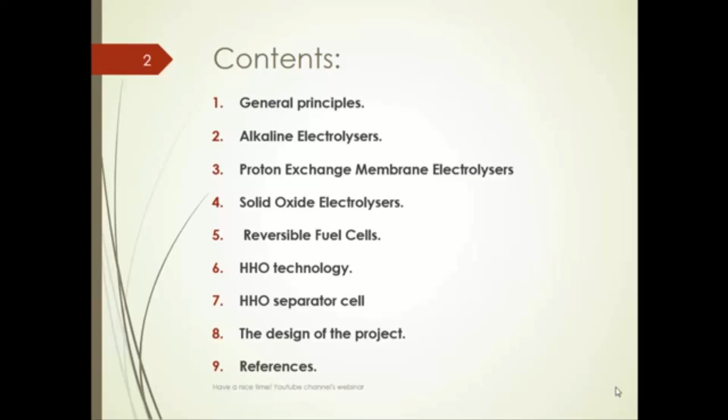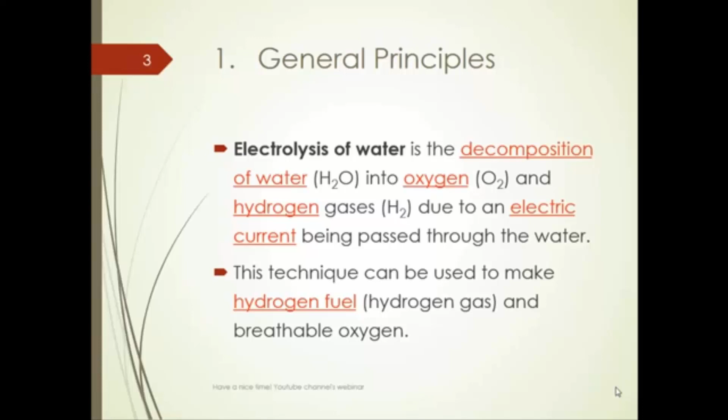So the general principles: the electrolysis of water is the decomposition of water H2O into oxygen and hydrogen gases due to an electric current being passed through the water. This technique can be used to make hydrogen fuel gas and breathable oxygen. But we have to add some additive to the water.

An electrical power source is connected to two electrodes or plates, typically made from some inert metal such as platinum, stainless steel, or iridium, which are placed in the water. Hydrogen will appear at the cathode, the negatively charged electrode, because H will be H positive where electrons enter the water, and oxygen will appear at the anode, the positively charged electrode.

So this is the very simple technique: H2O, with a cathode and anode, and a battery of 9 to 12 volts, with positive and negative terminals. It is not recommended at all to use tap water - you have to use distilled water to avoid any salts or problems.

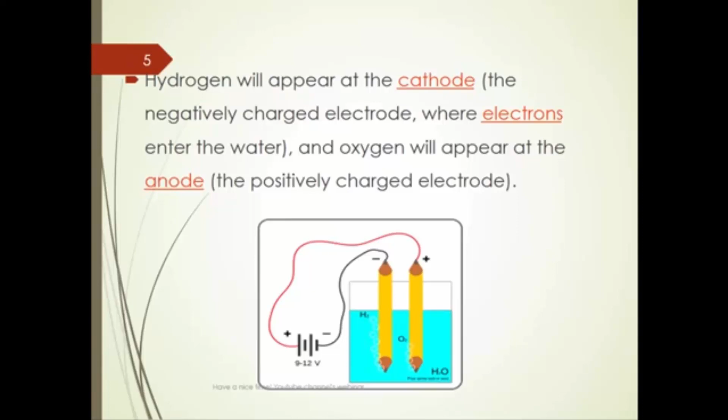Assuming ideal faradaic efficiency, the amount of hydrogen generated is twice the amount of oxygen, and both are proportional to the total electrical charge conducted by the solution. However, in many cells, competing side reactions dominate, resulting in different products and less than ideal faradaic efficiency.

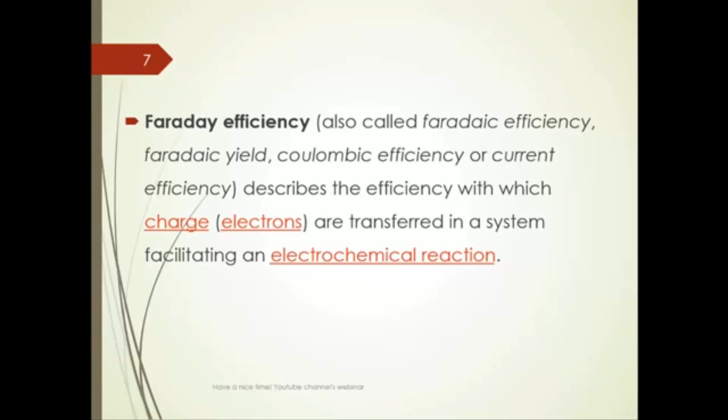Faraday efficiency, also called faradaic efficiency, faradaic yield, Coulombic efficiency, or current efficiency, describes the efficiency with which charge electrons are transferred in a system facilitating an electrochemical reaction. The sources of faradaic losses are experienced by both electrolytic and galvanic cells when electrons or ions participate in unwanted side reactions.

These losses appear as heat and/or chemical byproducts. That's why if we measure the temperature of the cell, we find the temperature increases with time. An example can be found in the oxidation of water at the positive electrode in electrolysis - some electrons are diverted into the production of hydrogen peroxide. The fraction of electrons diverted represents a faradaic loss and varies between different apparatus.

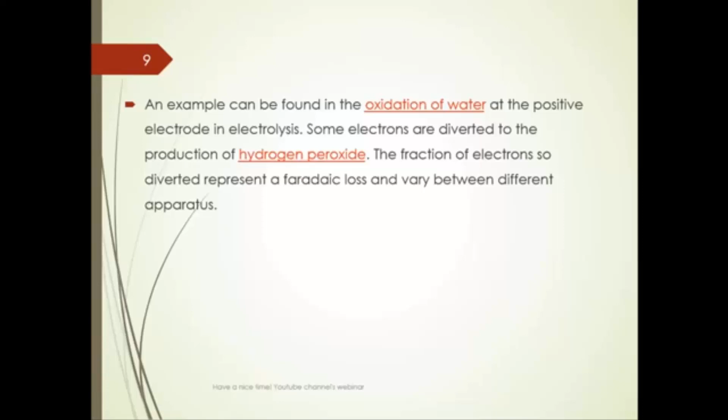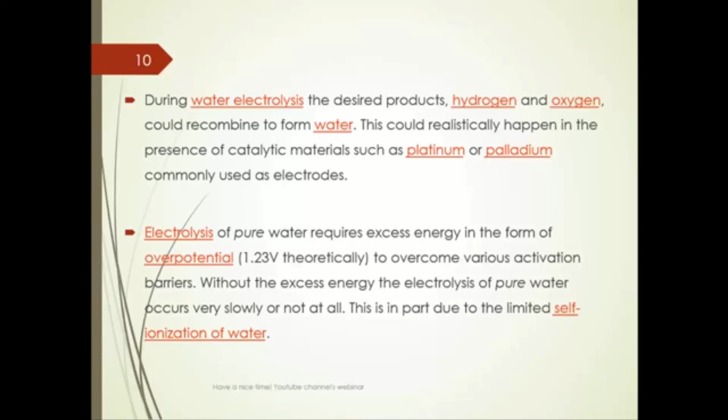Electrolysis of pure water requires excess energy in the form of overpotential, 1.23 volts theoretically, to overcome various activation barriers. Without excess energy, the electrolysis of pure water occurs very slowly or not at all. This is in part due to the limited self-ionization of water. So we have to get excess energy using a high voltage electrical source like 9 or 12 volts.

The efficiency of electrolysis is increased through the addition of an electrolyte, such as salt, acid, or base, and the use of electrocatalysts. So the more electrocatalysts are in the solution, the more productivity it will be.

Okay, so we have electrolyte NaOH or KOH commonly used.

One important use of electrolysis is to produce hydrogen. The reaction that occurs is 2H2O aqueous to 2H2 gas plus O2 gas. That's why the volume of hydrogen is twice the volume of oxygen.

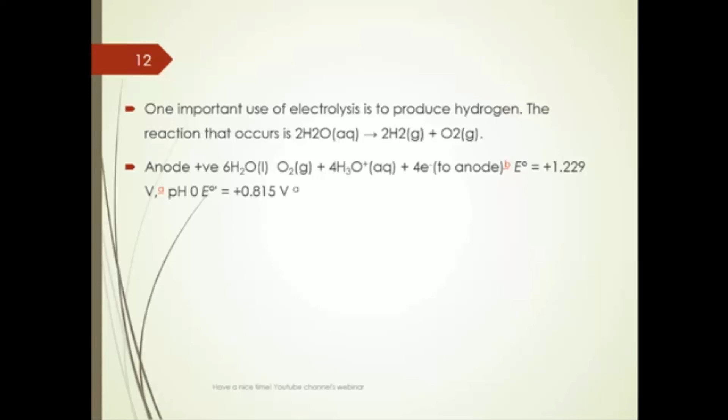And here are the anode, positive, and here are the equations, and you can find these equations in the literature. Here is the anode, and here is the cathode. This has been suggested as a way of shifting society towards using hydrogen as an energy carrier for powering electric motors and internal combustion engines without any toxicity.

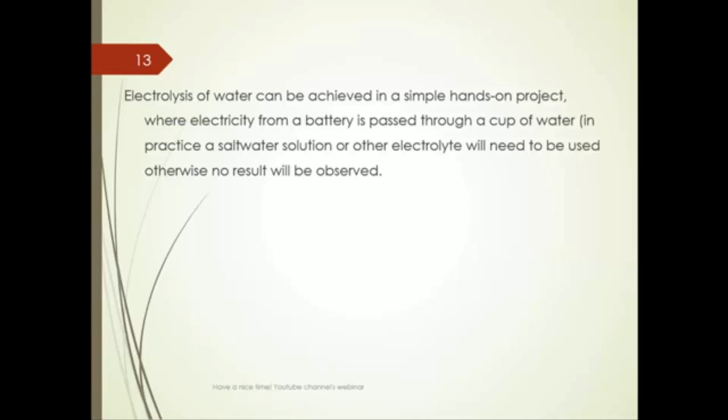Electrolysis of water can be achieved in a simple hands-on project where electricity from a battery is passed through a cup of water. In practice, a salt water solution or other electrolyte will need to be used, otherwise no result will be observed. The recommended separator of hydrogen and oxygen is Nafion, because it prevents the formation of side reactions, since it allows only water and protons to pass, but it is very expensive.

So we have here a deal to produce the hydroxy gas. It contains hydrogen and oxygen as a mixture. It's not water, but it is hydrogen plus oxygen. You can use it as a fuel, or a flammable gas. But if you want to get only pure hydrogen, you have to use a separator or membrane, like Nafion.

This is from the website Fuel Cells, and here is Nafion 117, and we have here the price per sheet, and this is from 3 years ago. Okay, so the price is $32, and I think this is good. Not bad, but this is the highest. This is the high cost membrane, or the high cost part.

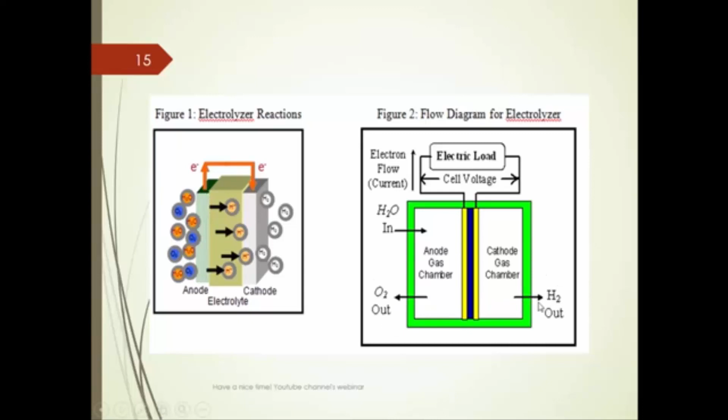Here is the anode and cathode, and here is the electrolyte and electrolyzer reactions. We see here H2O enters the cell, and here H positive, H positive, H positive, and here is the oxygen. So we get pure hydrogen if there is a membrane. And here the electron, and here the cell voltage, H2O enters from here, and here we have O2 out and H2 out if there is a membrane. If there is no membrane, we will get H2 plus O2 as a mixture, two gases.

So for each mole of H2O consumed, 1 mole of H2 is generated and 2 moles of electrons are passed through the external circuit. To convert electron flow, moles of electrons per second, to electrical current, coulombs per second or amps, one would use Faraday's constant, coulombs per mole of electrons.

The rate of hydrogen production is directly related to the current as follows. So that's why the more current in the cell is, the more productivity of hydrogen.

To be in electrolysis mode, the voltage must be greater than the voltage corresponding to zero current. This voltage is called the open circuit voltage, and theoretically it's equal to 1.23 volts.

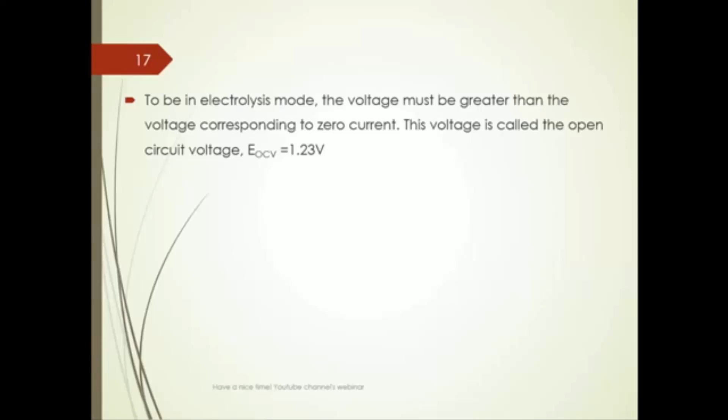The hydrogen reaction rate is directly proportional to the current, since for each hydrogen molecule that reacts, 2 electrons are formed. For electrolysis, operating voltage EOP must be greater than EOCV.

Hydrogen is produced with an external power source. This is indicated by negative current values. So over the entire range of current densities, there is a linear fall in voltage as the current density increases.

Assuming fast kinetics, this voltage drop is caused by a resistance to H positive flow across the electrolyte membrane. In this case, the operating voltage can be described as EOP equals EOCV minus I multiplied by R multiplied by A, where I is the current density, R is the resistance, and A is the cross-sectional area of the electrolyzer. In physics and electrical engineering, this effect is referred to as Ohm's law.

While an electrolyzer uses an electrochemical device for separation of water into hydrogen and oxygen, it draws many parallels to typical membrane separation processes across a dense membrane. Our primary interest is the rate of H2 production. However, H positive is the species transported across the membrane, and so the flux across the membrane is written with respect to H positive.

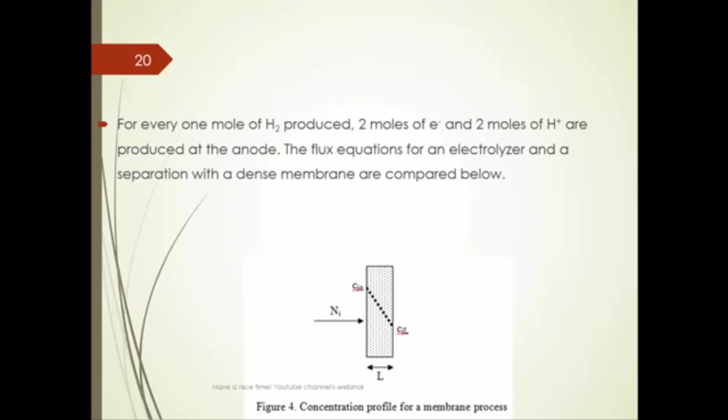The flux equations for an electrolyzer and the separation with a dense membrane are compared below. We have here Ni and L, and the Ci0 and CiL. You can check these out from research papers and theoretical literature covering the simple principles. Here is the nomenclature: the concentrations at the membrane interfaces, CIO and CIL, the current density, and here the L for the thickness of the membrane.

Considering their relation, I think the thickness of the membrane has to be small to increase the rate of productivity and to decrease the resistance.

So the only difference between the flux equations for the electrolyzer and membrane separation is that the electrolyzer takes into account electrical ions. For the electrolyzer, voltage directly corresponds to the concentration of oxygen at each membrane interface via the Nernst equation. The concentration of oxygen is typically expressed as a partial pressure of oxygen, PO2, like this.

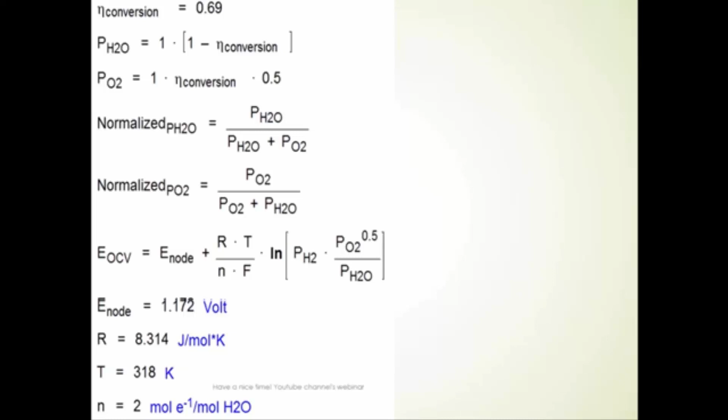Here are the equations. You can write them using any equation solver, like engineering equation solver software, and then study the what-if questions. You can change any number here and get the results, and decide if this is suitable for your project or not.

We have here our overall system design from a research paper. I think the first step in the system design was to determine the desired characteristics of the electrolyzer to produce at least 0.5 kilograms of hydrogen at a pressure sufficient for fueling FCEVs. I think Avalence LLC, Inc., Milford, CT, could make a high pressure electrolyzer capable of reaching an output pressure of 6500 psi, very high, without any compressor.

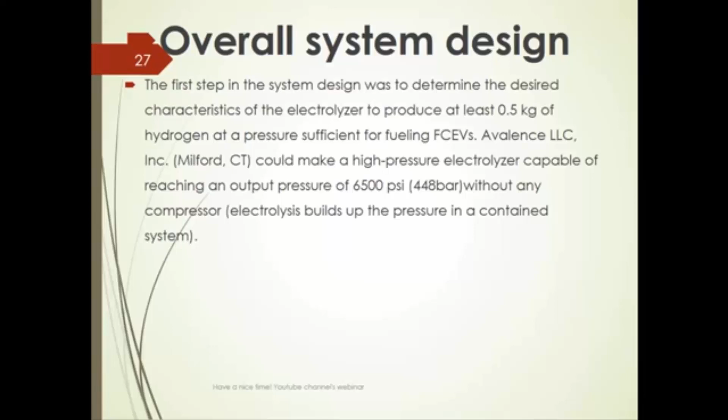Such electrolysis builds up the pressure in a contained system. This is from a research paper: this electrolyzer would contain 48 cells, and if the cells were put into banks of 24, the cell voltage when operated at a nominal current of 130 amperes will produce 2.8 kilograms of hydrogen per day.

So the system would consume approximately 6.5 kilowatts to make 2.8 kilograms of hydrogen in 24 hours of operation. And here is the kilowatt hour: to make 0.5 kilogram of H2 would require approximately 28 kilowatt hours of electrical energy.

At a pressure of 44.8 megapascals, 6.4 kilograms of compressed hydrogen could be stored in 231 tanks for dispensing to fuel cells.

So whatever the numbers are, we have here a grid for the voltage. Here the AC rectifier, 6.5 kilowatts at nominal 50 V direct current output. Here are 4 solar arrays, and here a DC converter, and here we have water input, water purification, and the DI water. Here is the system, and here the control electronics and battery system, battery charger, and here we get the H2 at this psi, and then we get this H2 as a fuel.

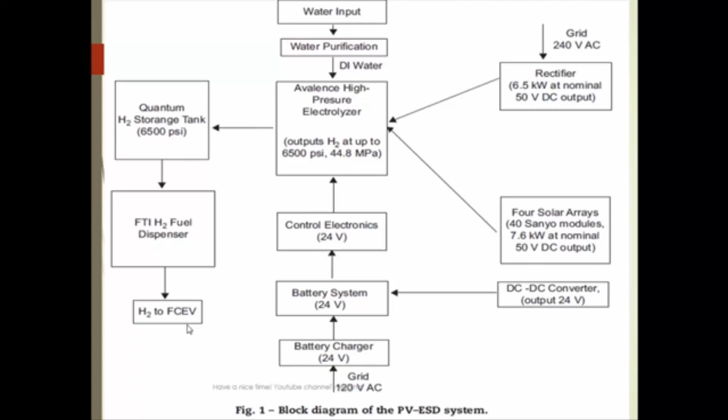It's the source of the fuel to the fuel cells. This is used in hydrogen cars. We get the H2 and use the fuel cells to produce electricity. The fuel cells are like the turbine: we use fossil fuels for turbines, but here for the fuel cells we use H2, and then the fuel cells produce electricity for the cars.

Here is the reference, a research paper. I think it was published on Science Direct, in the International Journal of Hydrogen Energy. We have here the details of the operating conditions of their system, not our system. You can get this paper and check out the details.

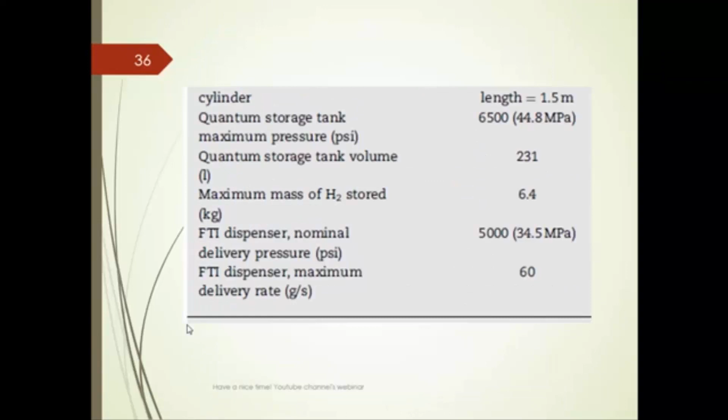Now we have to talk about the solid oxide electrolyzer cell.

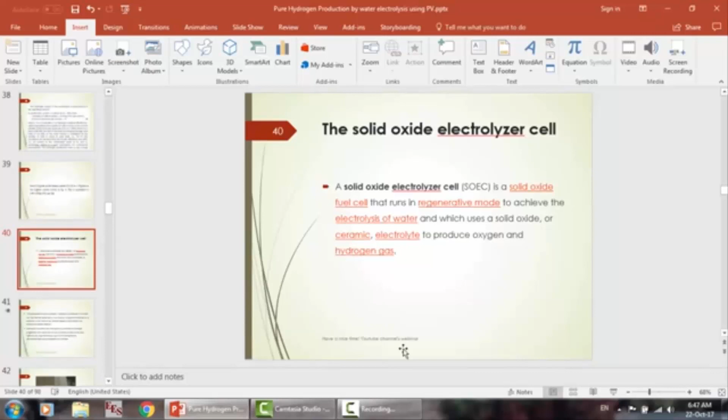A solid oxide electrolyzer cell, SOEC, is a solid oxide fuel cell that runs in a regenerative mode to achieve the electrolysis of water, and which uses a solid oxide or ceramic electrolyte to produce oxygen and hydrogen gas.

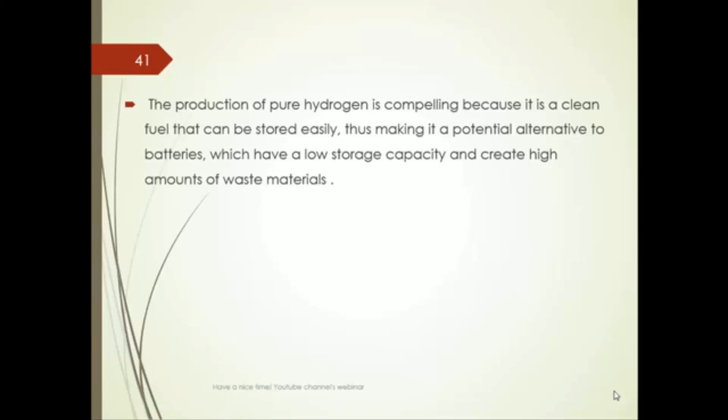The production of pure hydrogen is compelling because it is a clean fuel that can be stored easily, making it a potential alternative to batteries, which have a low storage capacity and create high amounts of waste materials.

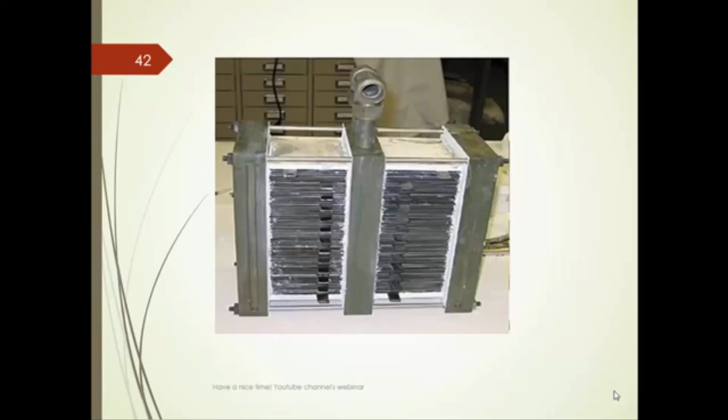Electrolysis is currently the most promising method of hydrogen production from water due to high efficiency of conversion and relatively low required energy input when compared to thermochemical and photocatalytic methods. Here is our system, and you can check out the details from the internet or research papers.

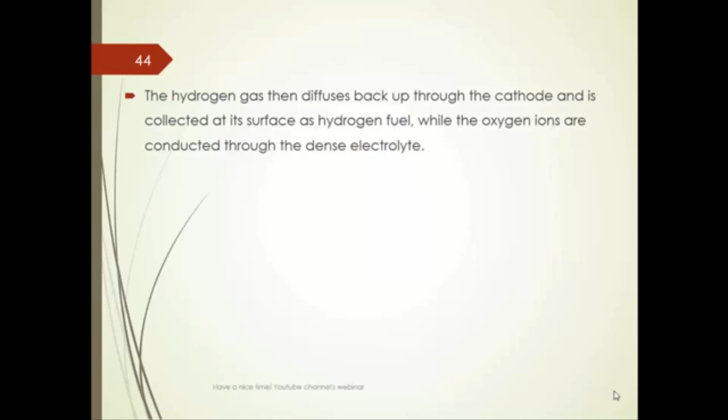The general function of the electrolyzer cell is to split water in the form of steam into pure H2 and O2. Steam is fed into the porous cathode. When a voltage is applied, the steam moves to the cathode-electrolyte interface and is reduced to form pure H2 and oxygen ions. The hydrogen gas then diffuses back up through the cathode and is collected at its surface as hydrogen fuel, while the oxygen ions are conducted through the dense electrolyte.

The most common electrolyte, similar to solid oxide fuel cells, is a dense ionic conductor consisting of ZrO2 doped with 8 mole percent Y2O3, also known as YSZ. Zirconium dioxide is used because of its high strength, high melting temperature of approximately 2700 Celsius, and excellent corrosion resistance.

The fuel electrode of the cathode, the most common material, is Ni-doped YSZ. However, under high steam partial pressures and low hydrogen partial pressures, the Ni-YSZ interface causes oxidation of the nickel and leads to irreversible degradation.

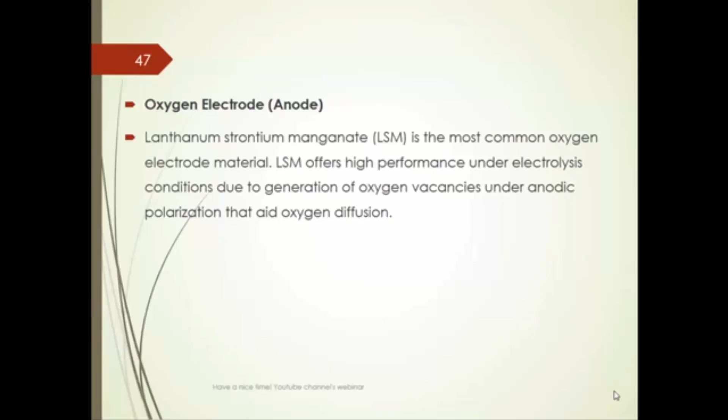The oxygen electrode, or anode, is commonly made of lanthanum strontium manganate, LSM. LSM offers high performance under electrolysis conditions due to the generation of oxygen vacancies under anodic polarization that aid oxygen diffusion. The electrolyte must be dense enough that the steam and hydrogen gas cannot diffuse through and lead to recombination of H2 and O2.

At the electrolyte-anode interface, the oxygen ions are oxidized to form pure oxygen gas, which is collected at the surface of the anode.

Now I have to talk about another technology: proton exchange membrane, or polymer electrolyte membrane. PEM electrolysis is the electrolysis of water in a cell equipped with a solid polymer electrolyte. Here the electrolyte is not liquid like NaOH or KOH, but solid, responsible for the conduction of protons, separation of product gases, and electrical insulation of the electrodes.

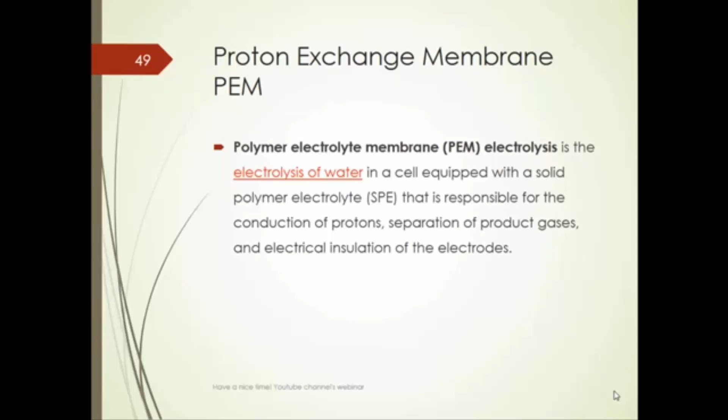The PEM electrolyzer was introduced to overcome issues of partial load, low current density, and low pressure operation currently plaguing the alkaline electrolyzer. Electrolysis is an important new technology for hydrogen production as an energy carrier, with fast dynamic response times, large operational ranges, high efficiencies, and very high gas purities, 99.99999%. This shows the efficiency or benefit of using a PEM electrolyzer.

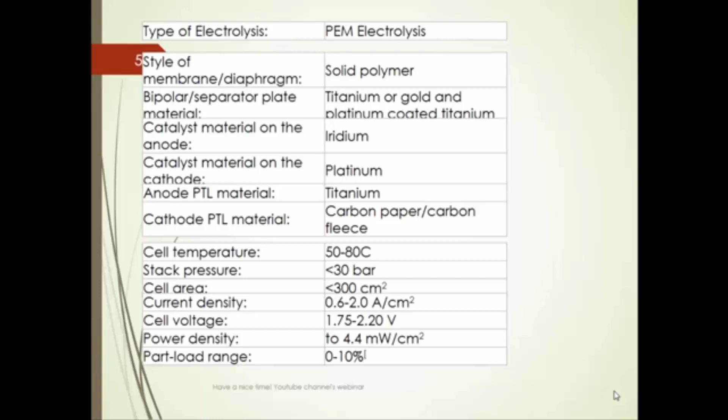Here we go, this is the benefit of using solar energy: no need to use any other electrical source from the grid or AC current. Why? Because we need a DC current supply, so the best thing to use is the solar cell.

Just using the solar cell will produce the required electricity to run this project and get the H2 and O2. Every gas is in the tank, but we must use the membrane.

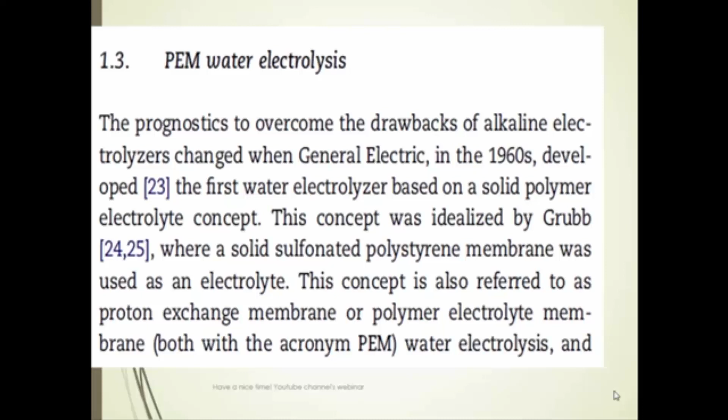Here at PEM water electrolysis, many research papers have talked about this. You can check it out on Science Direct, ResearchGate, or any other website.

It's not easy to be carried out at home. No, it requires high funding actually, because it requires very high accuracy and many things to be done.

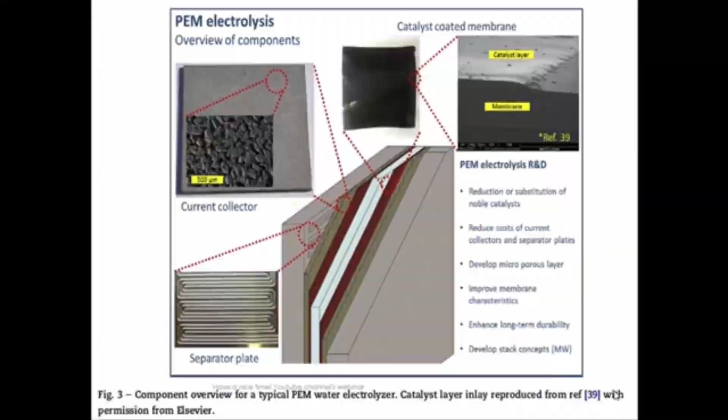So, Faraday losses and crossover: the Faraday losses describe the efficiency losses related to current supplied without leading to hydrogen at the cathodic gas outlet. The produced hydrogen and oxygen can permeate across the membrane, referred to as crossover.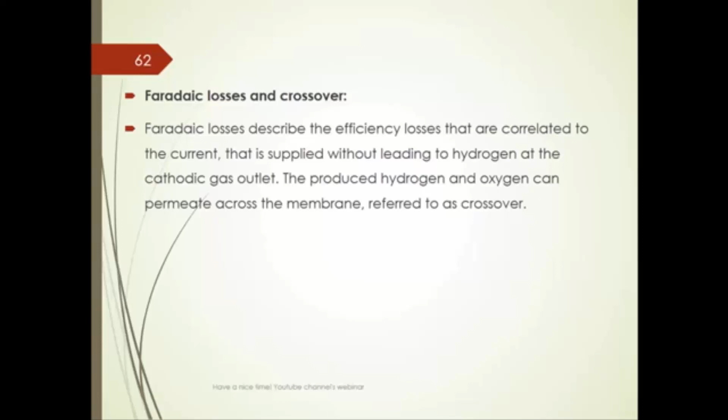Mixtures of both gases at the electrodes result. The cathode oxygen can be catalytically reacted with hydrogen on the platinum surface of the cathodic catalyst. At the anode, hydrogen and oxygen do not react at the iridium oxide catalyst. Thus, safety hazards due to explosive anodic mixtures of hydrogen and oxygen can result.

That's why we have to carry out these experiments or designs carefully due to these hazards. The supplied energy for the hydrogen production is lost when hydrogen is lost due to the reaction with oxygen at the cathode and permeation from the cathode across the membrane to the anode.

So this system is not easy, and hence the ratio of the amount of lost and produced hydrogen determines the Faradaic losses. At pressurized operation of the electrolyzer, the crossover and the correlated Faradaic efficiency losses increase.

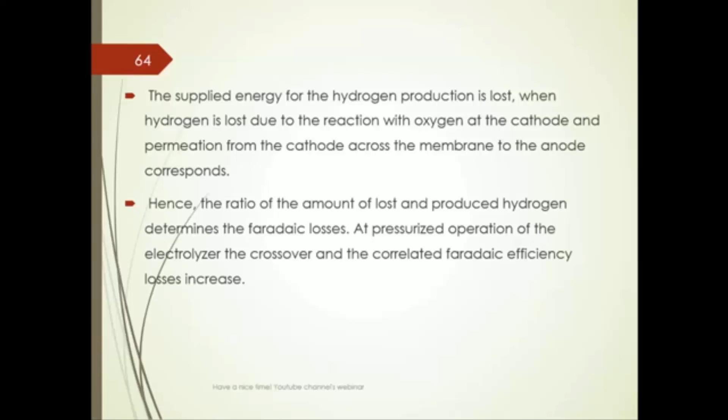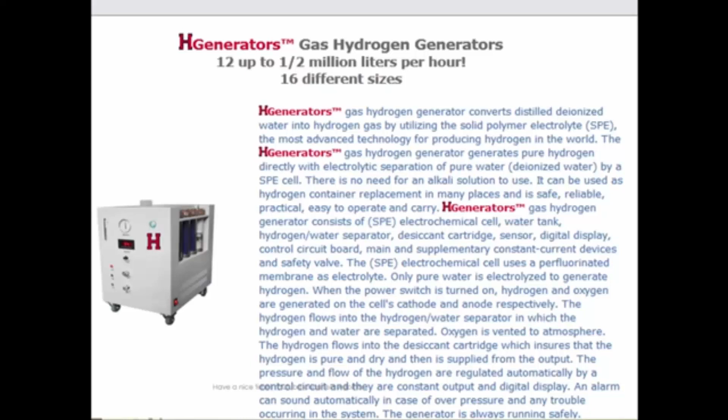As you see, you will pay a high cost. It's a high cost energy or a high cost fuel, but it is very clean compared to fossil fuels. That's why we have to find many ways to decrease the cost and increase the productivity of hydrogen by using many techniques, which we're going to talk about in this video or the next video.

That's why we have to find other low-cost techniques and ways that you can carry out or use at the faculty or any small-scale laboratory, such as the HHO hydrogen generators or hydroxy generators. So, gentlemen, if you want to watch a video about the HHO wet cell, I highly recommend watching this video. It's a very good video.

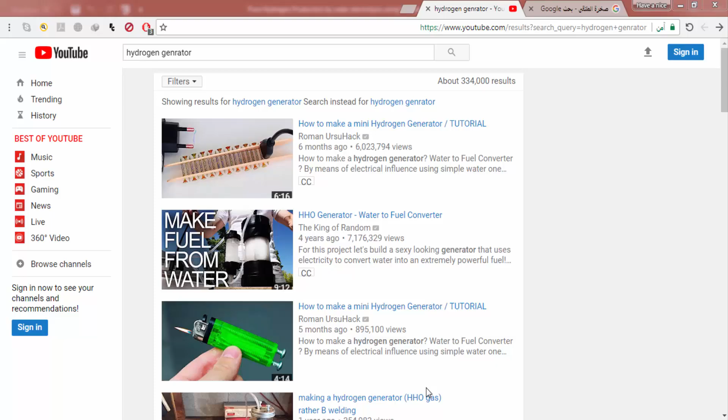So now we can watch the HHO dry cell.

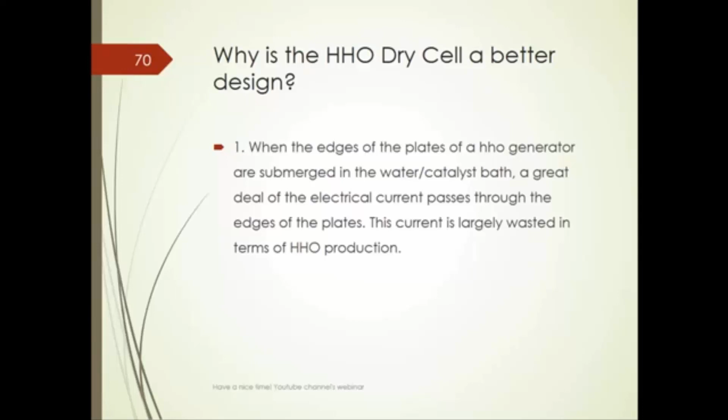Now, gentlemen, why is the HHO dry cell a better design? When the edges of the plates of an HHO generator are submerged in the water catalyst bath, a great deal of the electrical current passes through the edges of the plates. This current is largely wasted in terms of HHO production.

When the edges are outside of the bath, as with the HHO dry cell, all of the current is forced to travel directly to the faces of the plates. Therefore, all the current supplied to the HHO generator is utilized efficiently, making HHO gas. The electrolyte bath attacks and will eventually destroy the electrical connections if they are submerged.

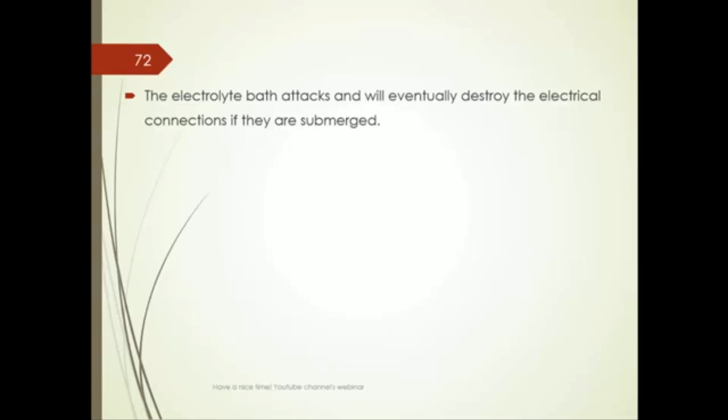With the HHO dry cell design, the water catalyst solution is stored outside the cell in a separate reservoir and recirculated by the HHO dry cell, providing the cell is designed correctly. This helps in producing more HHO gas and less heat and steam.

The plates of their HHO dry cell are made of 316L 18-gauge stainless steel. You will see many cell designers using 20 gauge or less, but we prefer thicker material to ensure you get a lifetime of usage from your system without wearing out. Of course, this is the statement of the company.

316L has been found to have the best resistance to attack from the process of electrolysis. However, mounting hardware, wire, and cable are very difficult to find in 316L grade, and are unnecessary, not to mention very costly to use.

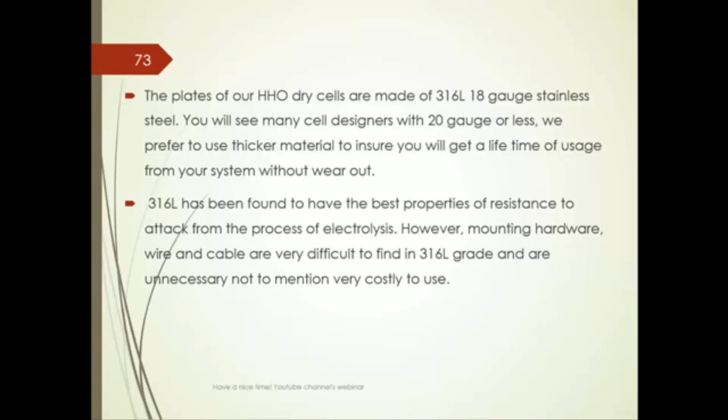So, wet HHO cell disadvantages: the wet cell design has the electrode plates, anode (positive supply) and cathode (negative supply), fully submerged in the electrolyte solution. The oxygen which gathers around the positive electrode, the anode, starts reacting with the metal surface, creating oxidization.

This will eventually erode the plate and it needs to be replaced. That's why I think they replace it every 6 months.

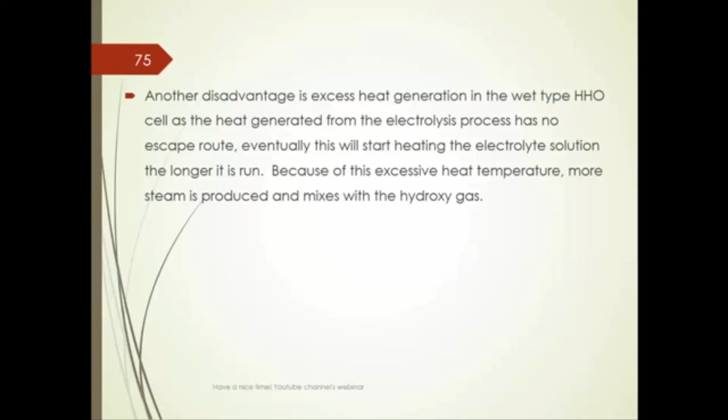Another disadvantage is excess heat generation in the wet type HHO cell, as the heat generated from the electrolysis process has no escape route. Eventually, this will start heating the electrolyte solution the longer it's run. Because of this excessive heat temperature, more steam is produced and mixes with the hydroxy gas.

But the dry HHO cell design, the name mainly came from the most significant difference from the wet cell design, and that's because the outer edges of the plates and the connections are sealed from the wet area. Each plate comes with a gasket to seal the outer edges from getting wet.

The name might be slightly misleading because this type of dry cell still uses the same principle of water electrolysis to generate the HHO gas, only with greater efficiency because there is no extra heat energy being produced.

The electrolyte is stored in an external expansion tank, often called the bubbler, similar to a radiator expansion tank, and the electrolyte enters the HHO cell by gravity. Once the hydroxy gas is produced through the electrolysis process, being lighter than the electrolyte, it has no other option but to rise back to the top.

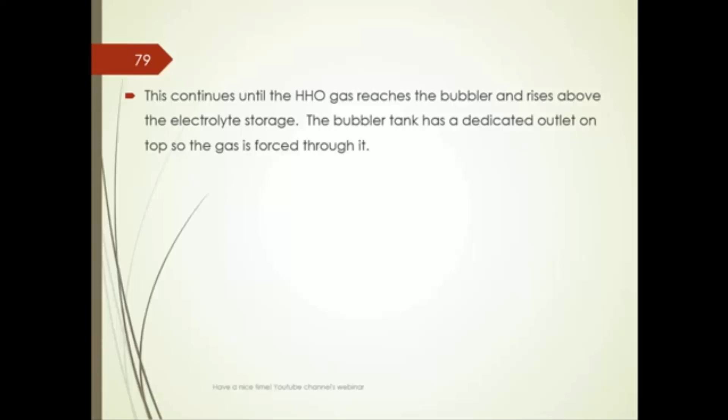And here is the beauty, or the intelligence, of this system. This continues until the HHO gas reaches the bubbler and rises above the electrolyte storage. The bubbler tank has a dedicated outlet on top, so the gas is forced through it.

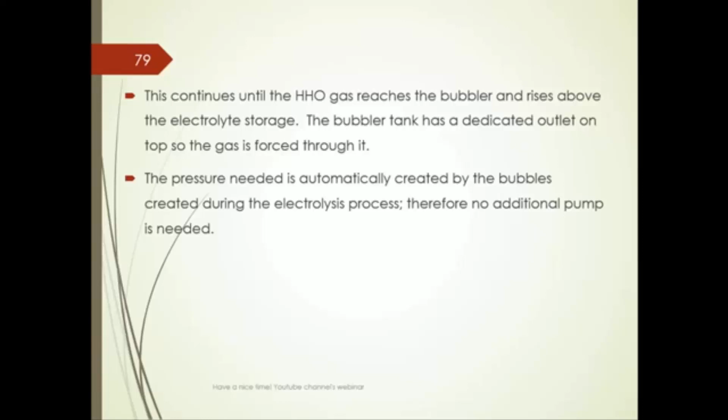The pressure needed is automatically created by the bubbles created during the electrolysis process. Therefore, no additional pump is needed.

So the advantages: the good news is that less maintenance is required, as long as there is no excessive heat on the HHO generator, which will shorten the life cycle of the seals. It's best to install it in a cool place, ideally where there is less engine heat being transmitted to the generator unit.

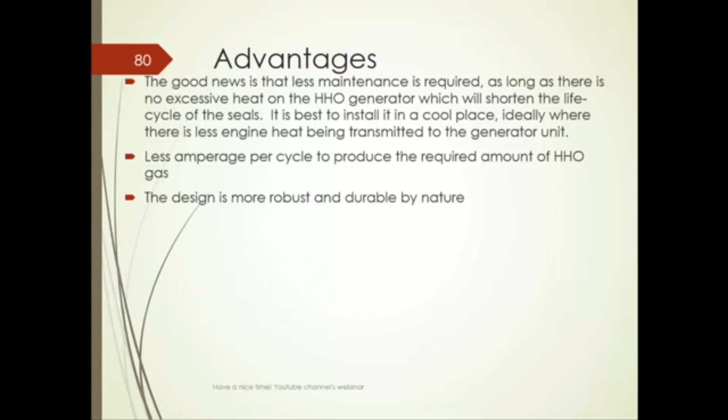Less amperage per cycle needed to produce the required amount of HHO gas. The design is more robust and durable by nature, with less maintenance needed for the same amount of working hours.

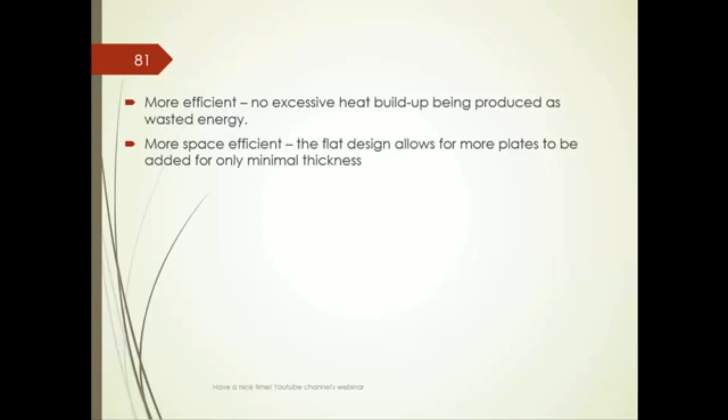More efficient, with no excessive heat buildup being produced as wasted energy. More space efficient, as the flat design allows for more plates to be added for only minimal added thickness. Less oxidation because of the limited electrolyte volume per cycle, and the electrical connections are totally isolated from the external body of the generator.

The same amount of HHO gas, or more, can be produced with less amperage. Cleaner electrolyte solution because of less oxidation on the anode plates compared to the wet cell. The dry HHO generator acts as a self-pumping action to the electrolyte solution.

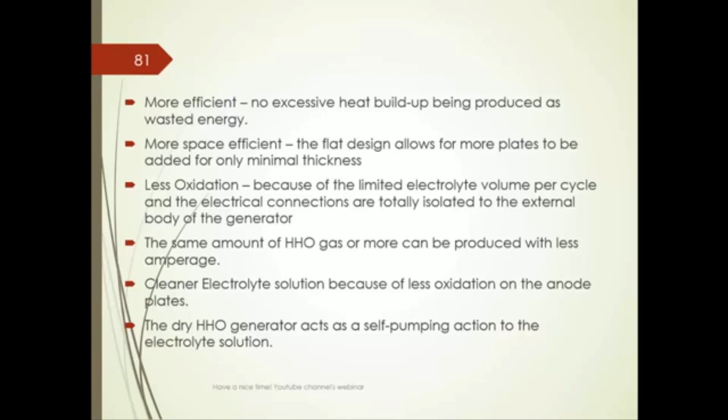So, the dry HHO cell disadvantages: there are not many disadvantages apart from when maintenance comes into play. The dry HHO cell unit has to be totally taken apart for the seals to be replaced. This process takes more time compared to the wet design.

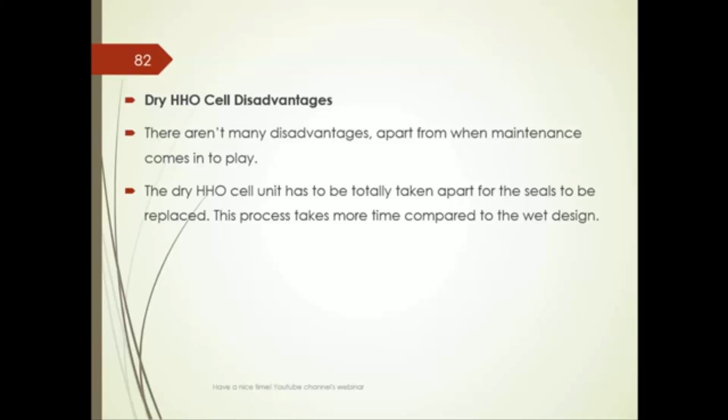So the membrane materials: polyester monofilament mesh works with sodium hydroxide (NaOH), and nylon monofilament mesh works with potassium hydroxide (KOH). We got this information from websites.

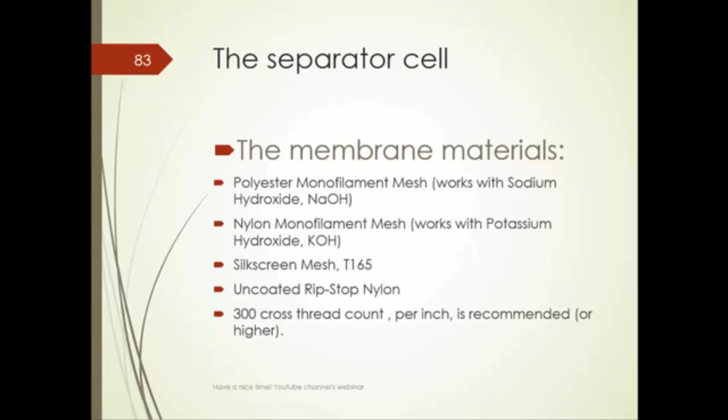Silk screen mesh T165, or uncoated rip-stop nylon with 300 cross thread count per inch recommended, or higher.

And here is the gasket. Holes match up with barb fitting holes in the plates. And the membrane - if you want to separate or get pure H2, you must use the membrane. If you don't want pure H2, and you just want HHO Hydroxy as a mixture to be used in cars...

...as a direct fuel, no need for storage, you don't have to use the membrane. I know people who use the HHO dry cell without any membranes, and they installed it in their cars, and it was very good - no soot, no CO2, no CO.

So the membrane here is centered over the gasket. Membrane is smaller than gasket. Gasket has two seals around the membrane, and holes must be cut in the membrane. Holes must match up with holes in the plates, and the gasket.

Rotate the second gasket like this and place it on top of the membrane so holes match up. It will be necessary to make a jig with pegs that fit the holes, to build the gasket-membrane-gasket as a unit. The membrane needs to be glued to the gasket as you go.

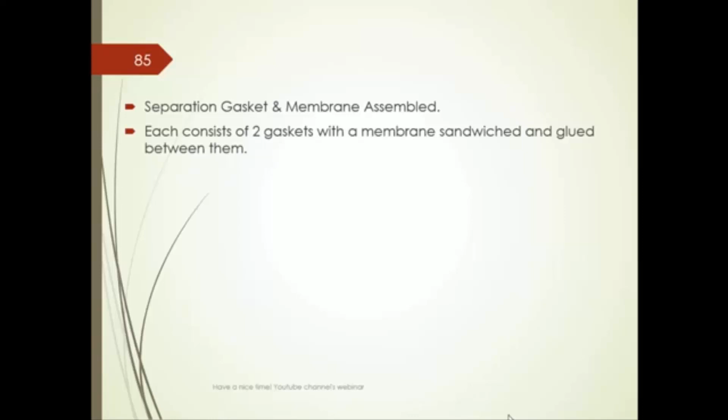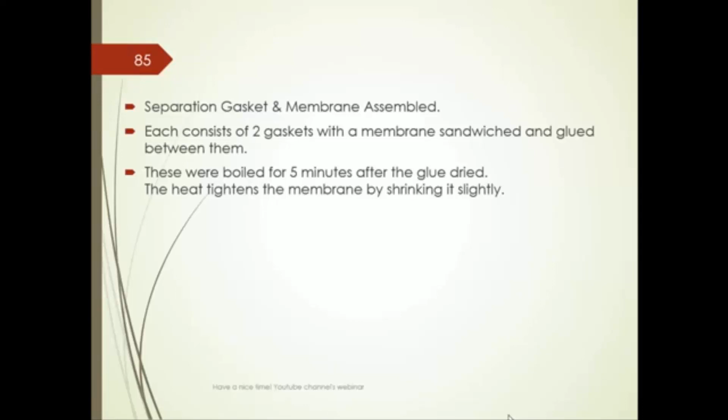Separation gasket and membrane assembled. Each consists of two gaskets with the membrane sandwiched and glued between them. These were boiled for 5 minutes after the glue dried. The heat tightens the membrane by shrinking it slightly. This process makes the gasket easy to handle, and also makes the cell easier to assemble.

And here we go - here's the HHO cell: the end plate, and the gasket plate, and here the end plate, gasket - same procedure, but there is a membrane. So this is the difference between the HHO cell used in cars and the separation cell used to store H2 as a pure gas. You can also get pure O2, which is used in hospitals, in the oxygen tanks.

So here: positive, negative, positive - this is the orientation, and the gasket hole creates a channel. The slot in the gasket lets the gas into the channel. Multiple cell stacks require reversing the position of the gasket hole slots for each stack - in other words, one stack will have the cut-out on the left, the other stack on the right. This is necessary in order to keep the gases separated, collecting in the right channel.

So let's check out this great video.

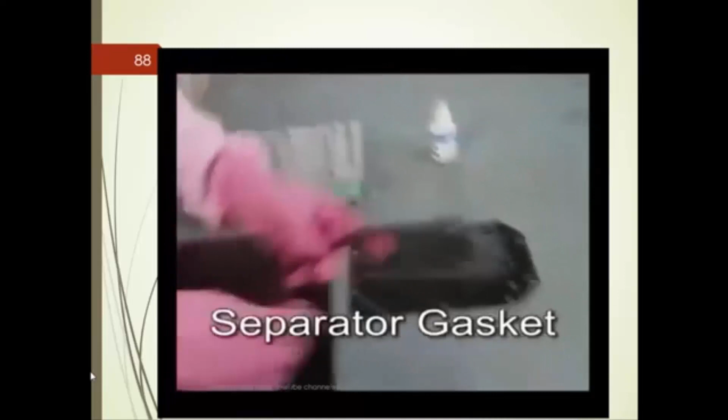First of all, these are the assembly kit, and all of these are the parts. These are the end plates - we have left and right. The inside surfaces have chamfered holes. All the threads are prepared with 2 nuts and a washer. All the stainless steel plates are scored with sandpaper. We have blind gasket and a special gasket.

We have a special membrane that has been cut by a laser. The insulated tubes are put onto the jig. First, we put on the blind gasket, and put the glue - a special glue - on the blind gasket, and then we put on the first active stainless steel plate.

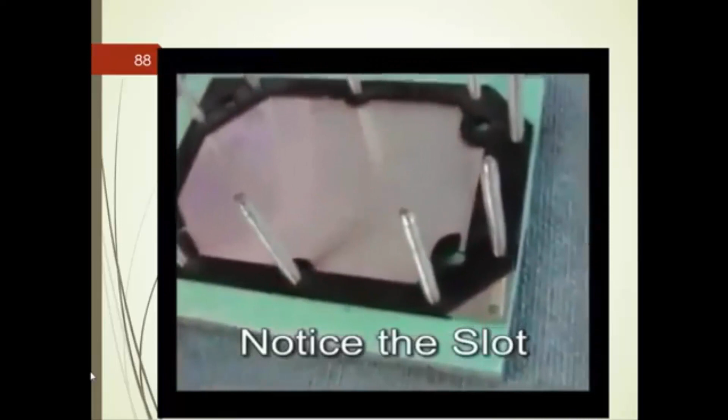We put special glue on the active stainless steel plate and then put the special gasket on top. We now put the special membrane on top and apply the special glue. The glue sets quickly in a few seconds, and we shrink the membranes with the hot air gun.

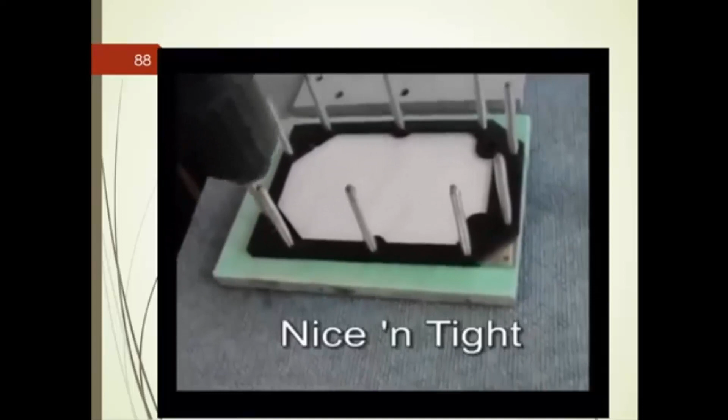We add the first neutral plate. We now do this 3 more times, so we have 4 neutral plates. We now have added 4 neutral plates and 4 membranes. They are nice and tight. Notice the slot.

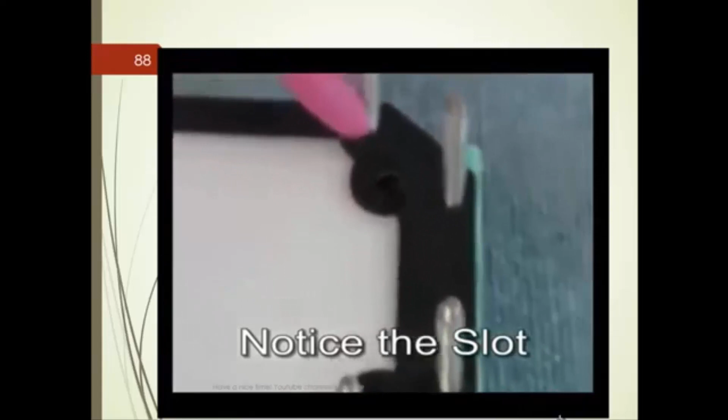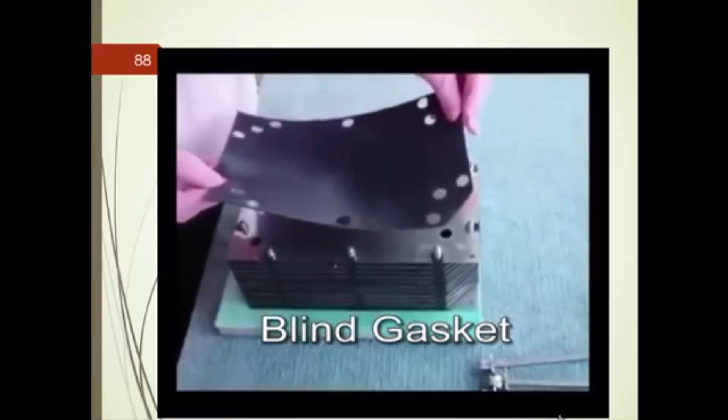Now it's ready for the bolts. Use the drill at low speed, but do not push.

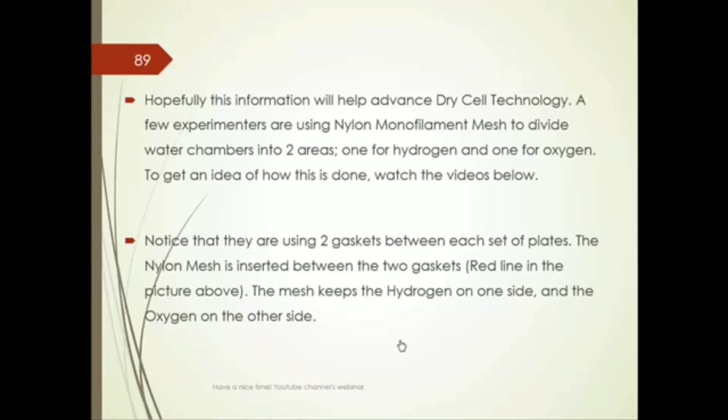The mesh keeps the hydrogen on one side and the oxygen on the other side. There are special slots, as we watched in the video, in the gaskets for channeling the gases to separate gas output ports. Instead of HHO coming out of one port, hydrogen and oxygen have their own ports, and here is the technology of the separation. Watch the videos.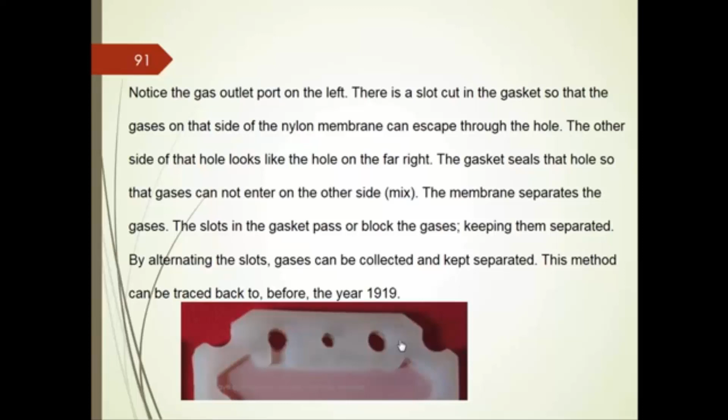They have tested this method of separation, and it does separate the gases quite well. It also allows water to refill the chambers, easily passing through the membrane. So the mesh forms a thin wall that allows water to pass through it, but not the bubbles.

The hydrogen and oxygen ions pass through the water, cross the membrane, and form gas on the electrode plate. They are attracted to positive or negative. The hydrogen stays on the negative side of the membrane wall, and the oxygen stays on the positive side. The mesh is a dividing wall, forming or separating two chambers. The gases rise to the top of their respective side of the chambers and collect at the top, escaping through the hole in the electrode plate.

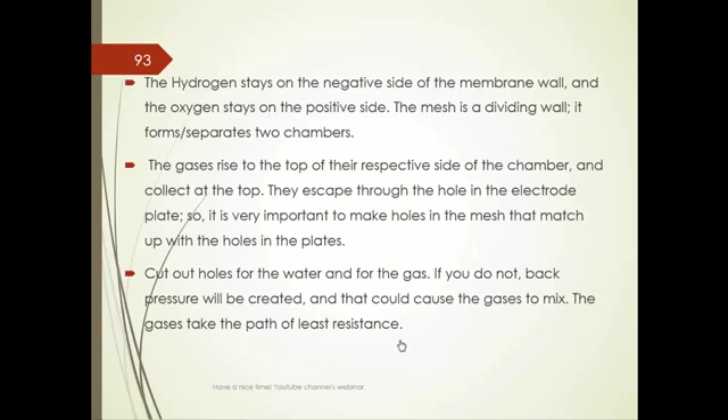It's very important to make holes in the mesh that match up with the holes in the plates, cutting out holes for the water and for the gas. If you do not, back pressure will be created, which could cause the gases to mix, since the gases take the path of least resistance. The gasket materials are high temperature neoprene rubber, EPDM rubber, or silicone.

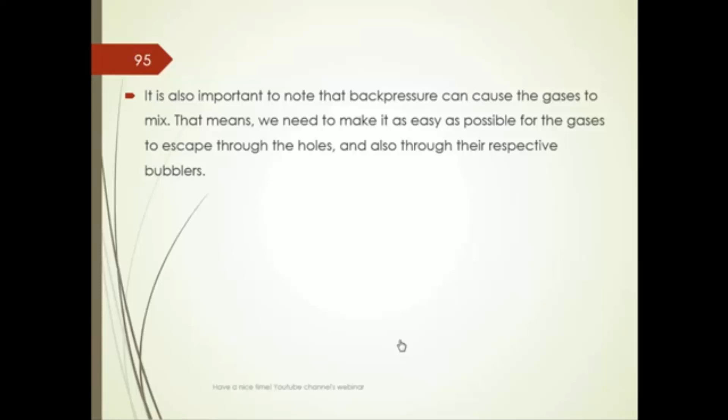It's also important to note that back pressure can cause the gases to mix. That means we need to make it as easy as possible for the gases to escape through the holes and also through their respective bubblers. Pressures should be the same in both bubblers, meaning the water levels need to be the same, so it may be necessary to equalize the water levels via a hose between them.

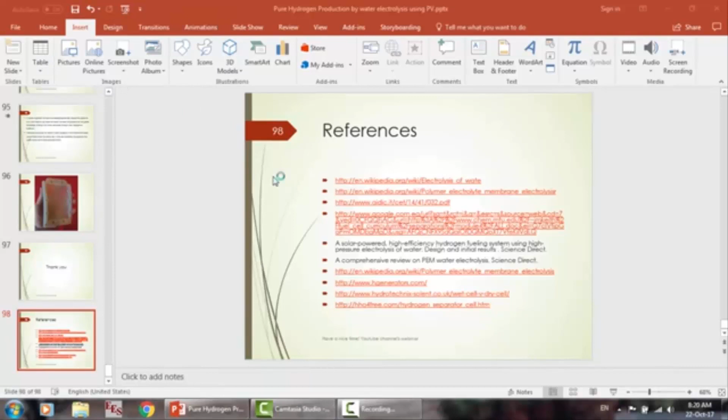Thank you very much, and you can see here the literature, or the research paper, here by the Alexandria Engineering Journal. This is available, and I think these are Egyptians from Alexandria University in Egypt, on the effect of hydroxy HHO gas addition on gasoline engine performance and emissions.

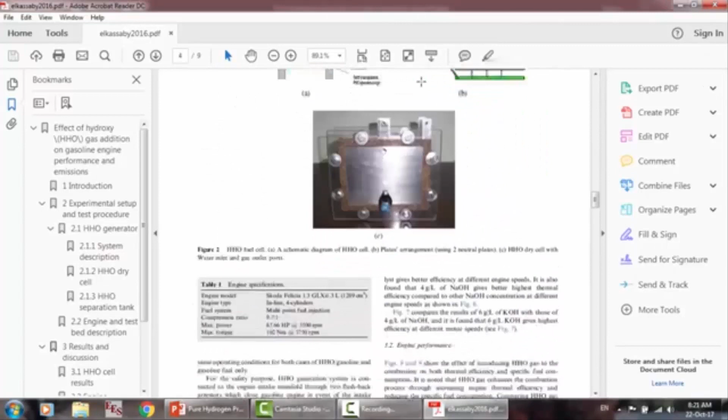You can skim through this, and here's the bubbler and the HHO, the same system, and it is the dry cell. This is their own design, and you can see many good things here, and the conclusion. You can check out many research papers on hydrogen generation.

Science Direct. You can check out sustainable hydrogen production and HHO cells, and the effect of hydroxy in the International Journal of Hydrogen Energy. You can check out all these websites and get these papers.